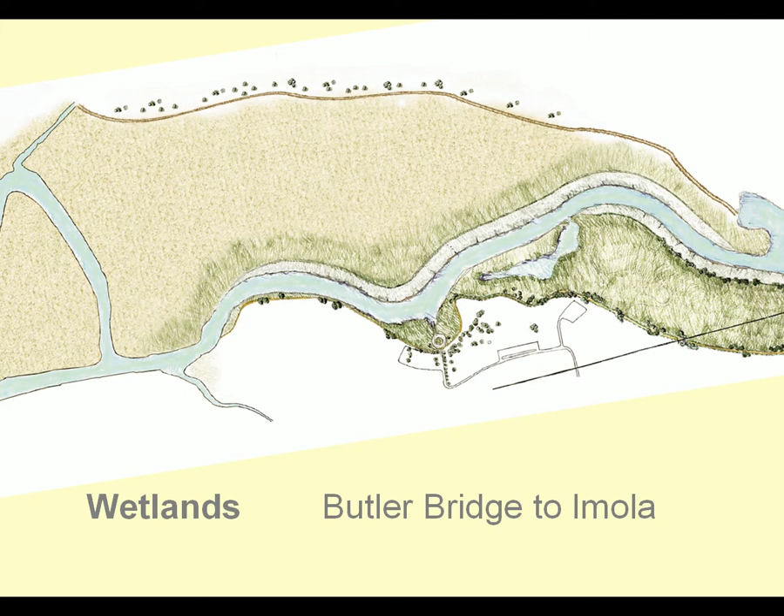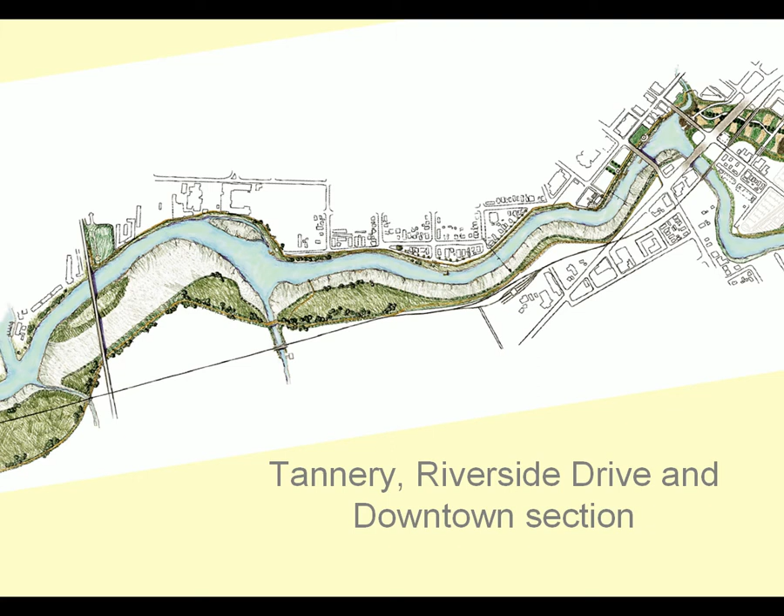The plan for the flood project started at the south end of the city, where wetlands and terraces were created. Moving north, upstream on the river, the project continued into the downtown area, where bridges were replaced and where a unique bypass channel is to be excavated in the future. Along the route, flood walls are being added, and a 6-mile river trail is being integrated into the flood project protection measures. What did all this mean for downtown Napa?

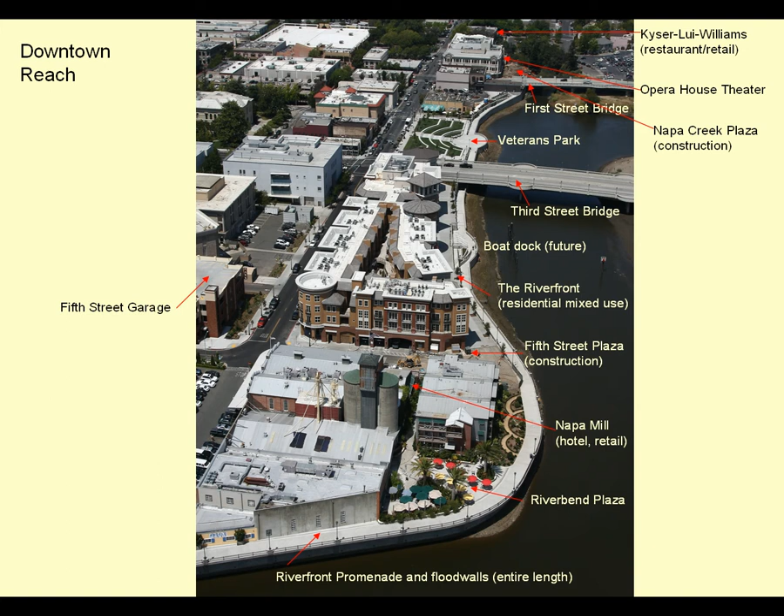Redevelopment Agency officials understood that it was time to seize a once-in-a-lifetime opportunity to guide the design of the public improvements within the downtown reach of the flood protection project, starting with the restoration of the historic Napa Mill, located at the southern end of the downtown reach of the flood project. In 1998, the Redevelopment Agency entered into an owner participation agreement with the Napa Mill owners to renovate and restore the historic structure and construct 2 complementary new buildings. The property has been vacant since the 1970s.

The agency provided a $180,000 gap loan, which the developer repaid in full, and the agency provided a $160,000 grant. Today, the property includes 65 hotel rooms, 3 restaurants, a cafe, nightclub, and specialty retail. The agency's grant secured a public plaza complete with new public art and restrooms for users of the public river trail.

The northern end of the downtown reach is anchored by the historic Kyser-Lui-Williams buildings. The Redevelopment Agency acquired the block in the 1980s with the intent to redevelop, but that failed to occur. So in the 1990s, the agency solicited developer interest and negotiated a disposition and development agreement for the historic preservation of the buildings. After a complete seismic retrofitting and restoration of the buildings, the property reopened in 2000, in time for a 5.0 earthquake that caused very little damage to these buildings. Today, some of Napa's best-known restaurants and retail shops bring the buildings to life.

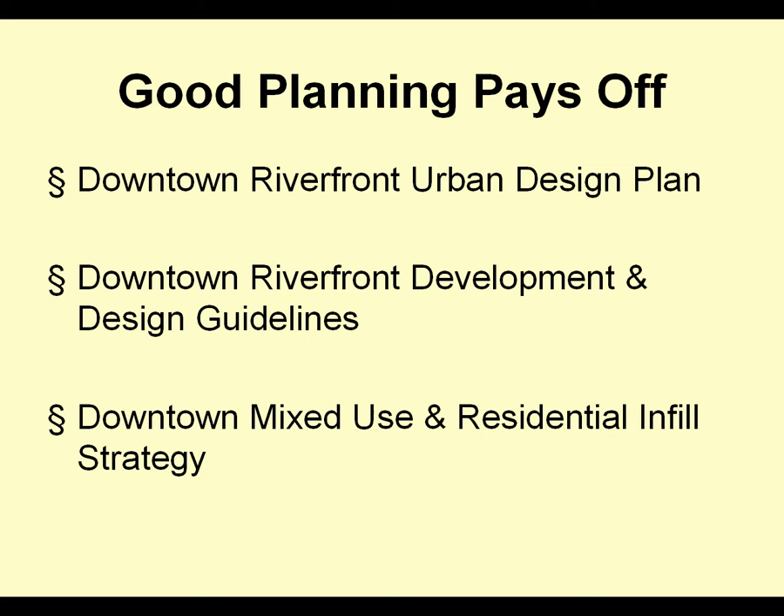Redevelopment Agency staff guided extensive public participation processes to develop guidelines and policies to shape the downtown riverfront. The 3 key policy documents noted here were prepared with the volunteer help of Napa's business community and residents, who collectively attended 25 meetings and 11 community workshops. The agency sponsored an urban design plan for the public improvements that would be constructed within the downtown reach as part of the flood project. The plan ensured that the public components of the project make a positive architectural contribution to Napa's historic downtown.

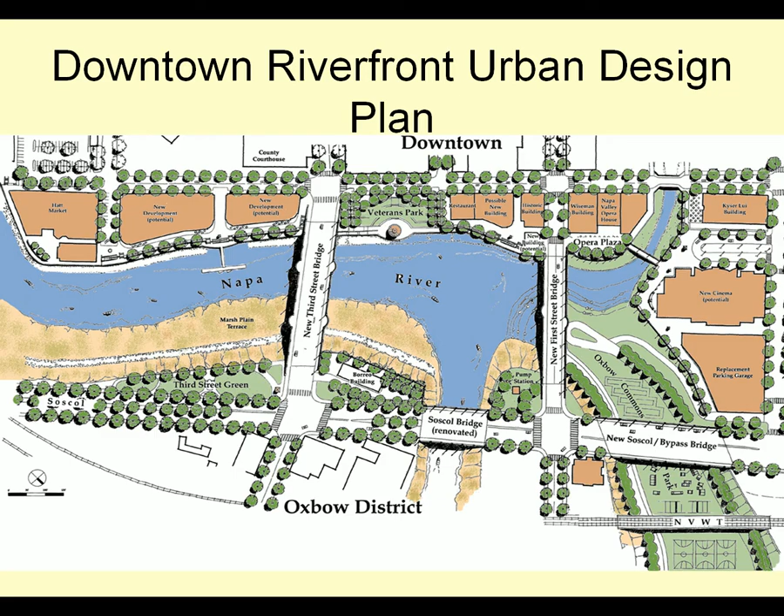One of the first bridge replacements for the flood project was the 3rd Street Bridge. This older concrete bridge had some classic design features the community wanted to incorporate into the new bridge, such as arches in the deck and in the concrete railing and historic light fixtures. The new bridge had to be much higher and longer and had to meet current Caltrans design standards.

But with a set of strong architectural design principles, the new bridge set the tone for the aesthetics of the improvements yet to come. Everything from the color of concrete, pedestrian overlooks, light fixtures, color of metal features, concrete scoring, dimensions of pilasters, and other architectural components are detailed in the urban design plan and carried throughout the public riverfront spaces.

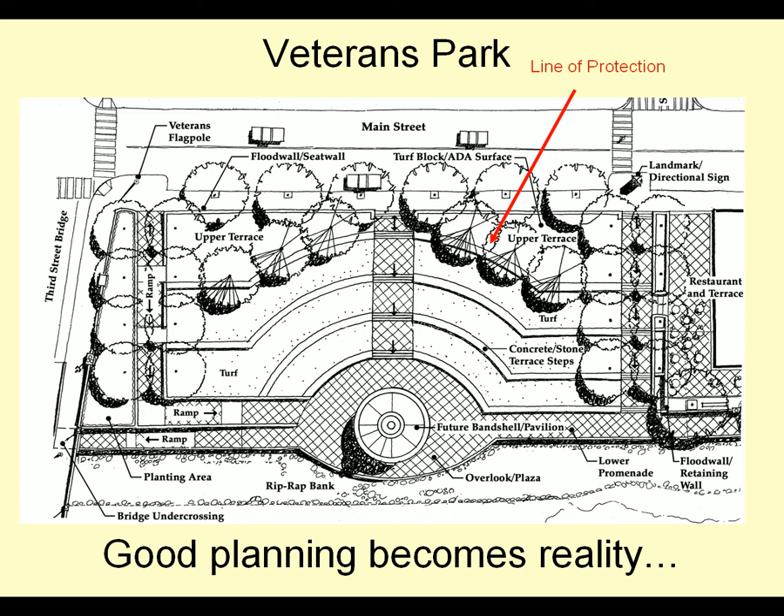We were presented with significant design challenges. How do you make a facility whose primary purpose is to contain floodwaters also attractive and functional for other uses? Veterans Park will fill with water up to the line of protection during a 100-year flood, and there are federal restrictions regarding placing vertical objects in the floodway, such as trees and lights. Veterans Park has always been a central gathering place and a venue for special events. Napa had an opportunity to make it so much more inviting and functional.

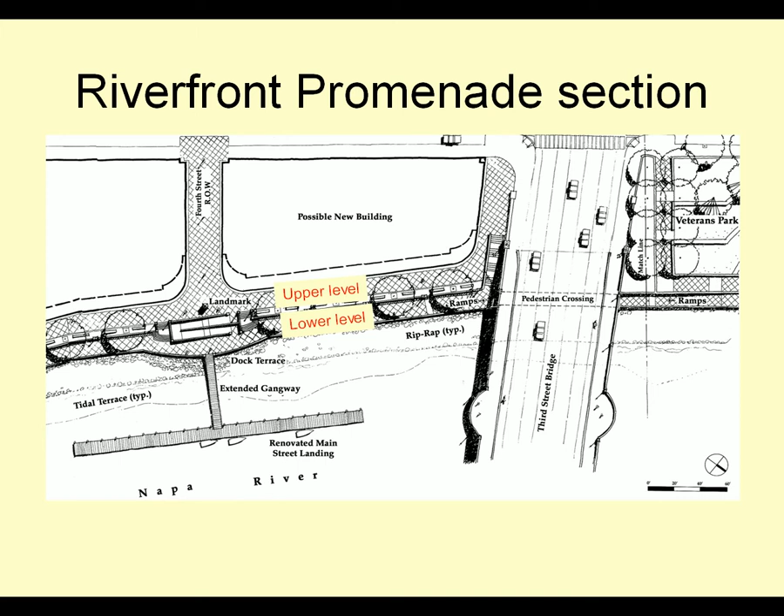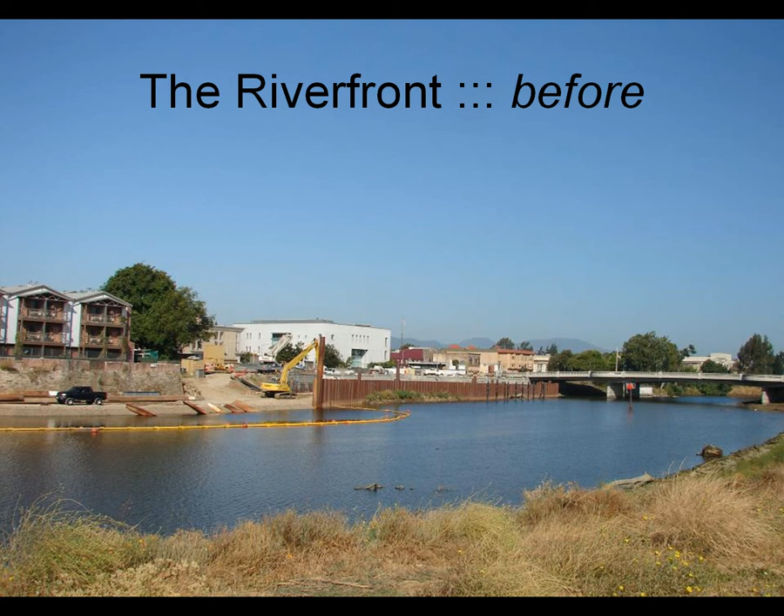The agency developed a downtown mixed-use and residential infill strategy adopted in 2004, which facilitated downtown's first residential mixed-use project on a vacant infill site. This project is called the Riverfront. The redevelopment agency led the coordination of public and private projects building in each other's vicinity. In this instance, the Army Corps of Engineers was in the process of building flood walls and a portion of the Riverfront Promenade when the private developer broke ground on the mixed-use project behind the flood walls. The Downtown Riverfront Development and Design Guidelines ensured a high-quality, river-oriented design and architectural components for the mixed-use project.

The Riverfront includes 2 levels of underground parking, 50 homes, 30,000 square feet of Class A office space, and 44,000 square feet of retail space. Leasing and sales are going very well, despite the difficult economy. To provide for existing and new parking demand the area would experience, the city and county partnered with 3 private developers to construct a new 480-space parking structure on a surface parking lot owned by the county. The redevelopment agency contributed bond funds to the design and construction to ensure a certain number of spaces to be available to the public.

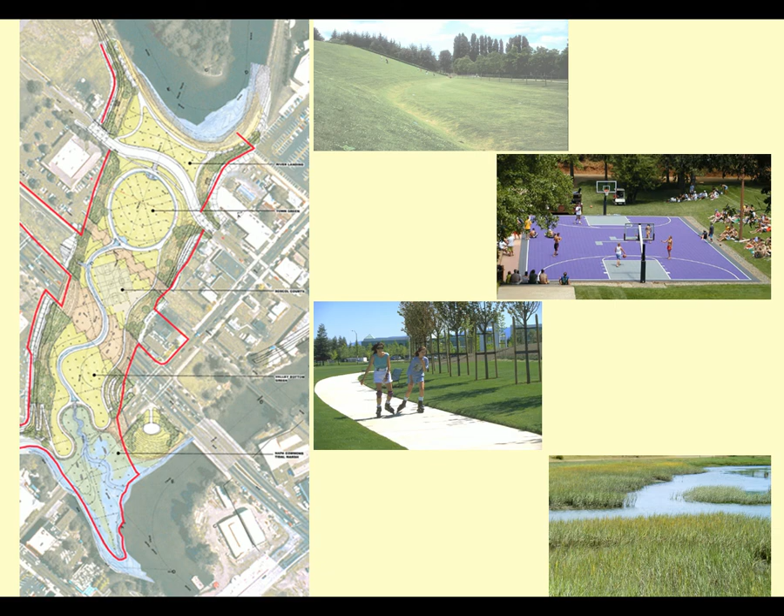One key element of the flood protection project is the future bypass channel. The early concept plans for the bypass channel left a lot to be desired. The channel, which passes under 2 bridges, will convey floodwaters in high flood events, so the sides will be armored and the bottom will fill with mud and debris, posing some major design challenges. This 12-acre property is too critical to ignore, so the redevelopment agency took the lead in working with the community to prepare a schematic design providing for seasonal recreational opportunities, pedestrian and bicycle linkages, special events and overflow parking, and aesthetically pleasing design, much like the images you see here. The U.S. Army Corps of Engineers is now incorporating this plan into final design plans.